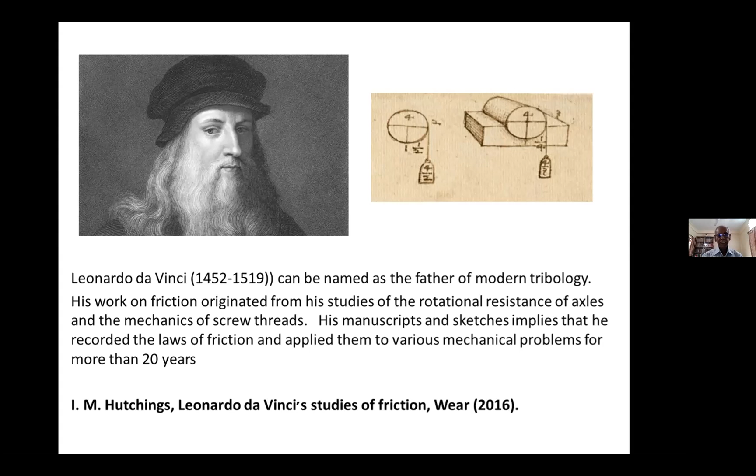So with this note on Leonardo da Vinci, we proceed to see who else has contributed to the development of frictional theory. The next we can think of is Guillaume Amontons in 1699. He was a Frenchman, and he looked into dry friction, and he concluded that friction is independent of contact area and is proportional to direct load, that is the load P in this picture here.

So this is a very well-known picture: as we drag or pull or push an object on a platform, frictional resistance is produced, and usually it is proportional to the load on it. And it is independent of contact area. This is something which needs a little thinking.

If we look back to the picture that we have seen many times, these red and blue rough surfaces rubbing one onto another, we see that the contacts are only on a few points, not on the whole surface. Therefore, the friction must be dependent only on the area which is in real contact. So here we distinguish between the real area of contact and the apparent area of contact.

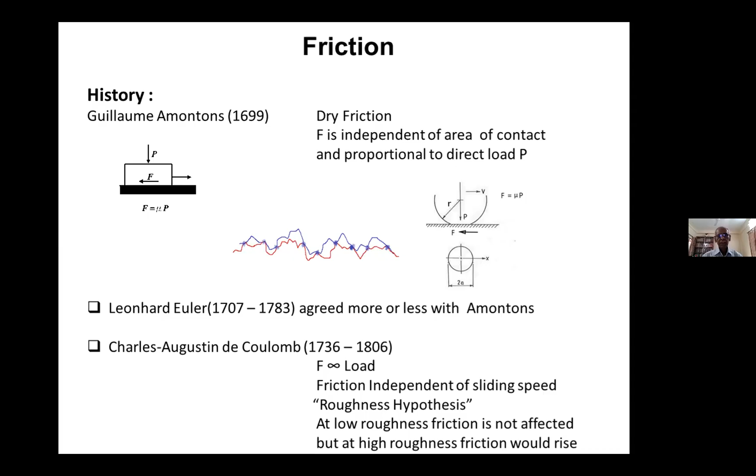Then we go to J.A. Ewing, who lived from 1855 to 1935. He came up with the idea that friction is a result of surface molecular forces, and this leads to the adhesion hypothesis. This is probably true to some extent, but it does not apply to all conditions and all surfaces.

If we think of adhesion, and it must be due to the intermolecular forces of the surfaces, then the surfaces have to be smooth and free of contamination. He supported this adhesion hypothesis in 1920, but he came up with these two points, that the surfaces must be free of contamination and must be smooth.

This is because both these parameters do not allow the surfaces to come close enough for the intermolecular forces to be operative. Therefore, for the adhesion hypothesis to be true, one has to consider the surface contamination and surface roughness.

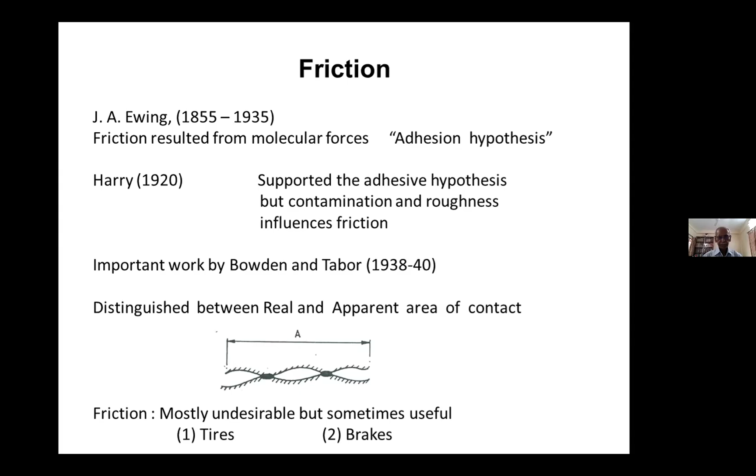With this introduction, we'll go to the laws of dry friction. It is important here to understand that friction when lubricated and when not lubricated are different. So here we consider only dry friction. It is well known that frictional force is equal and opposite to the resultant applied force, as shown in the figure. This is generally true, and we all accept it, but there are exceptions.

For example, you have a block on a plane surface, and you are trying to move it. Suppose you are unable to move it, that is, we apply an insufficient force to cause sliding. Then what happens to the energy spent on it? We cannot call that a frictional force because it is not sliding. So this force actually is not wasted. It goes into micro displacement at the contact, time-dependent displacement at the contact that we don't see.

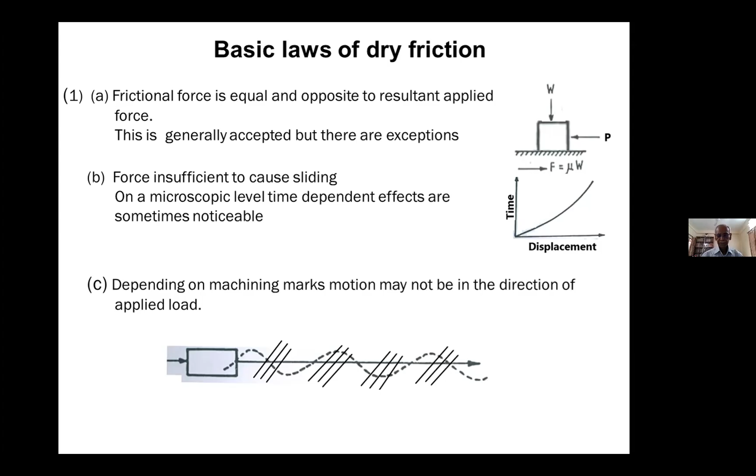Then we come to the second law, and that is also quite well known. Frictional force is proportional to normal load, and we all accept it without any hesitation. This means that the coefficient of friction mu, as shown in the figure, is constant with load. So we say F is equal to mu W. But this may not be true in all cases. For very hard material like diamond and very soft material like PTFE, this may not be true.

Experiment shows that we can write F equals C W to the power x, rather than mu W. So if x is 1, it reduces to F equals mu W, and the constant is the coefficient of friction. But if x is not 1, then we cannot call it coefficient of friction. We call it some frictional constant, say C here. So F equals C W to the power x. Experiment shows that for sliding of PTFE against steel, x is equal to 0.85, and we do not get a constant coefficient of friction, as shown in the picture.

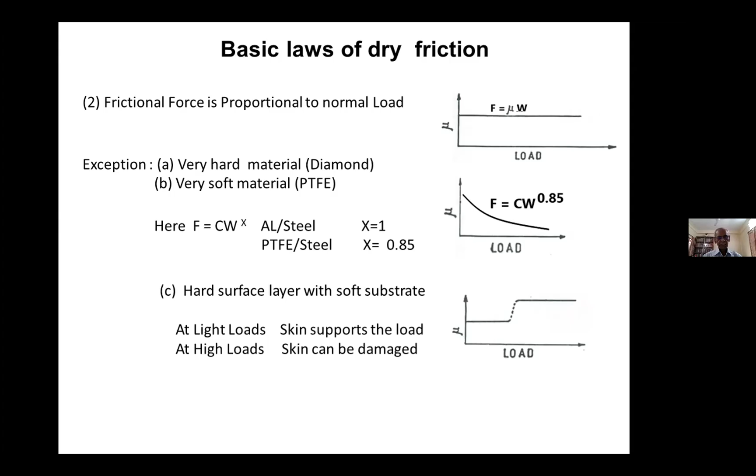Then we come to the third point, which has been mentioned by many people like Coulomb. Friction is independent of apparent area. And this again is very true, provided we do not distinguish between the real area and apparent area. It will be dependent on real area. But if we look at the apparent area of contact, then it is independent.

But this again cannot be stated categorically, because this will not hold if the surfaces are very smooth, because there the apparent and the real area of contact are almost same. So friction is independent of apparent area of contact is true unless the surfaces are very smooth.

Then we come to the fourth law. The frictional force is independent of sliding speed. This again is true and has been found in many experiments. But consider static and kinetic friction. If we push or pull a body, then initially frictional force will increase until a threshold point, and then at the threshold point it will start sliding and the friction remains constant.

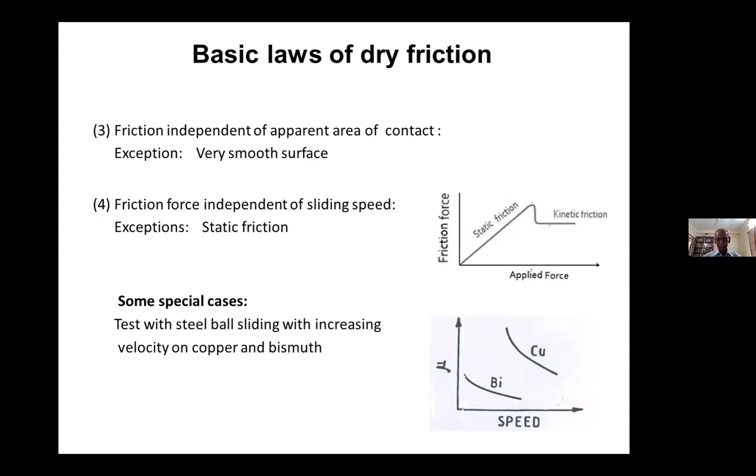So to state categorically that frictional force is independent of sliding speed will be true, provided these situations do not occur. Okay, so these are the four laws we have discussed. Now the fifth law, effect of surface roughness.

Now if we look at the variation of coefficient of friction with the roughness, we have written here CLA in the x-axis. We'll see that it normally is very high when the surfaces are very smooth. Then it comes down and then it remains constant over a range. And then at very high roughness it rises. This is what we've been discussing some time back.

When the surfaces are very smooth, intermolecular forces will be operated and adhesive friction will come into play. Then the friction will be very high. But when the surfaces are a little more rough, not in the atomic level, then the friction starts falling because it is no more in the intermolecular layer and the adhesive friction is not in action. Then it will fall and it will remain constant over the range.

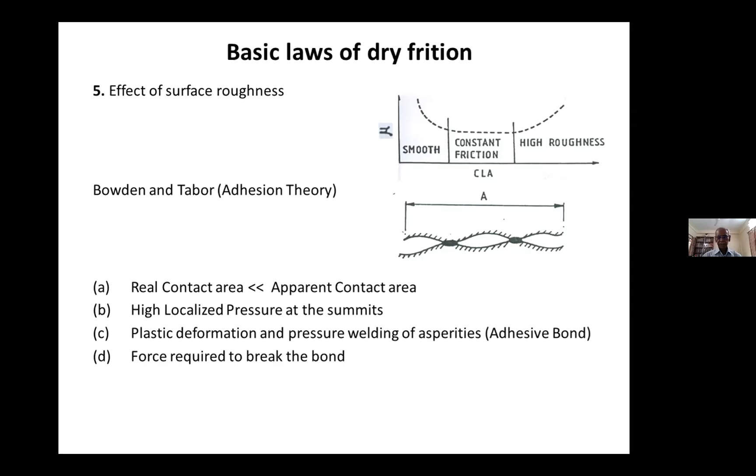So we can summarize that there are basically three laws of dry friction. One is friction is proportional to normal load, except for a few points we discussed earlier. Friction is independent of apparent area of contact. Again, there are some exceptions we discussed earlier. And friction is independent of sliding speed. Again, there are some exceptions. But these are the normally accepted laws of dry friction.

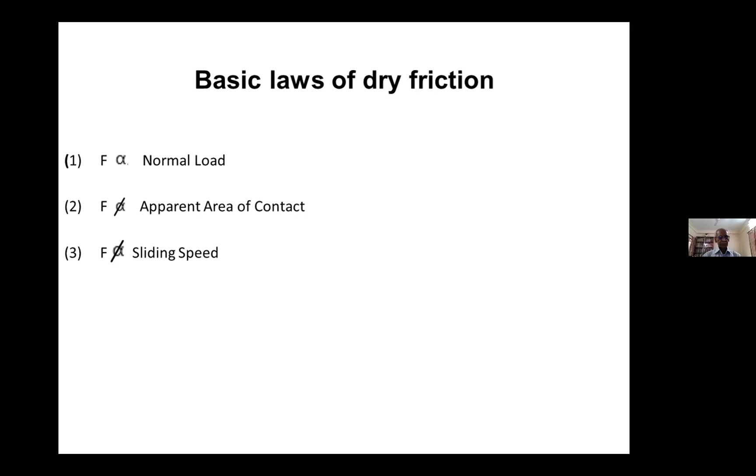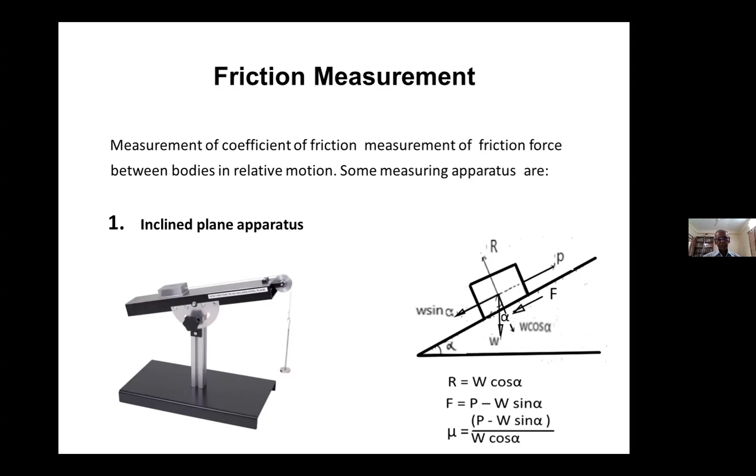But there are more sophisticated instruments and apparatus available these days. We'll consider only one of them now, and this is called the pin-on-disc apparatus. Pin-on-disc apparatus is simply what it says. It is like a gramophone record player. You take a disc, as shown in the top left-hand corner of the slide. You have a disc and a pin pressed on the disc, and you rotate the disc like here. So as you rotate the disc and the pin is loaded on the disc, there will be friction and also wear, but here we'll consider only the friction.

Friction will be generated, and depending on the material of the disc and the pin, we can find out the friction. When we say friction and wear, it is always a combination of materials. So if we say the friction of steel, it does not make any sense. We must say friction of steel against copper, friction of steel against bronze, friction of steel against some polymer or something. So it is a combination of materials. So if we change the pin material or the disc material, we can find out the friction.

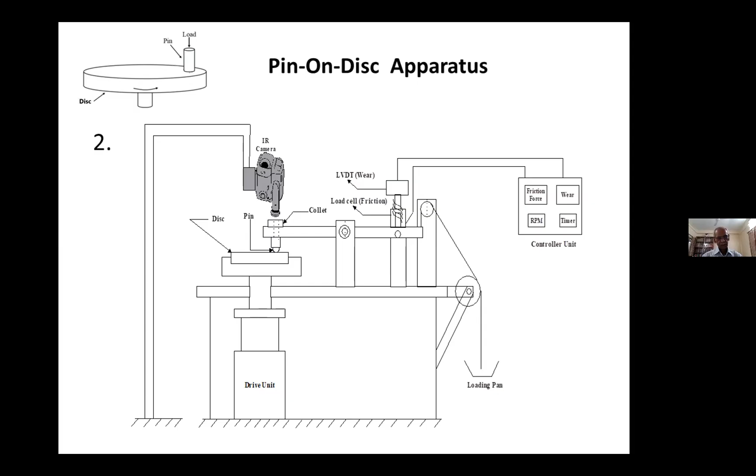Now, there are many other sophisticated instruments, but they all more or less follow this principle. Now we'll briefly look at a simple approach to adhesive friction. Friction can be of many types: adhesive, abrasive, corrosive, erosive, and other types also. But here, we'll take a look at the adhesive friction.